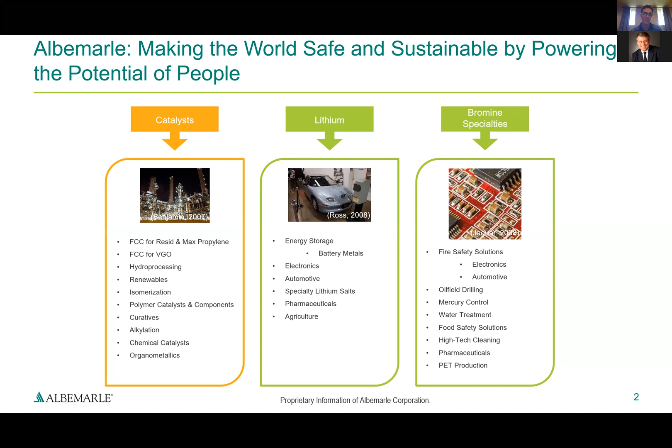And we as a business are looking at what are the chemistries that satisfy that need. And that's a little bit of what I want to talk to you about today.

I do want to call something out, and I do want to give a shout out to Anna Rogers. Anna Rogers, I think she's listening in. She is in our communications group, also an experienced technical writer. I guarantee you that nobody has ever seen a presentation with more citations than the one you're going to see today. Practically every bullet point has a citation. So Anna, great job with citations.

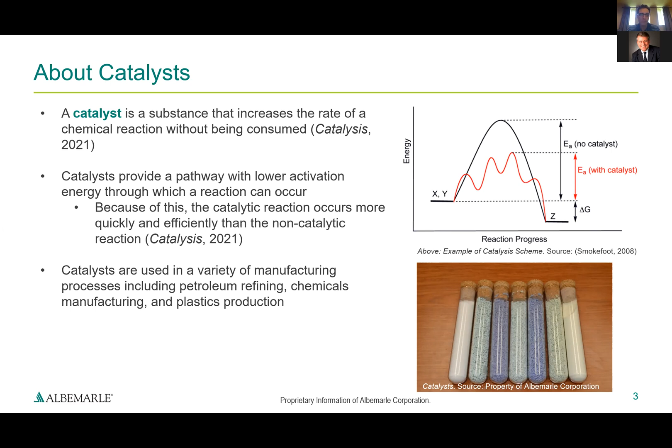So, kerosene and jet fuel, you'd be familiar with. Distillate is usually the term used for diesel and heating oil. Naphtha and gasoline within that range get blended into the gasoline that you use for your car. This is what happens in oil refining, step one. So if you go back before catalysts were used, this is about where it ended.

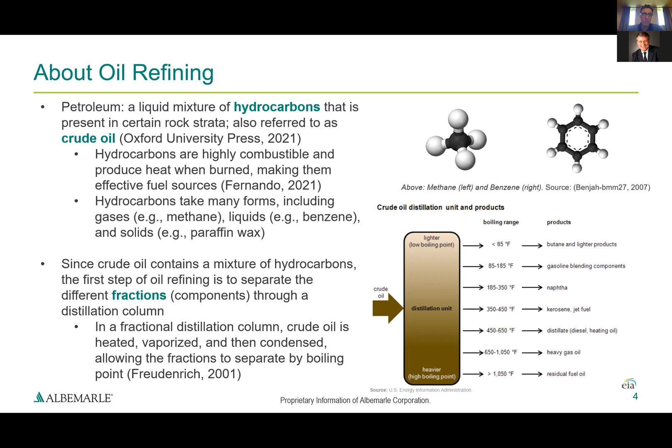When you pivot to using catalysts in refining, what you're doing is essentially fine-tuning that further fractionation of what you have. So after being separated in the distillation column, we further process those through catalytic processes. And there's two ways to get at that, right? It's often called cracking, and it means taking long hydrocarbons and breaking them into smaller fractions. Catalytic cracking uses a catalyst to speed up the reaction.

You can also do this thermally, which means by heat and pressure, but that's a slower process and it's more energy intensive. So catalytic cracking is the more common process that happens in industry to get to smaller and smaller chains, which become more and more usable to end markets that need chemicals or fuels.

And within the cracking world, there's two different kinds of cracking catalysts in an oil refinery. There's fluid catalytic cracking and hydrocracking. FCC cracks heavy oils, heavy gas oils like vacuum gas oils, what comes out of the distillation column, into gasoline, while hydrocracking cracks heavy oil into diesel and kerosene.

Now, Freudenrich has it right, but one additional piece on this is that when you do cracking of any kind, you get a mixture coming out of that. You don't just crack into gasoline. You get gasoline and you get diesel and you get kerosene and all the other fractions, olefins and things that come off of that. Just the process you use tends to give you more of one than another. So that's where FCC tends to crack more into gasoline, where hydrocracking cracks more into diesel and kerosene in volume percentage. So just to be clear.

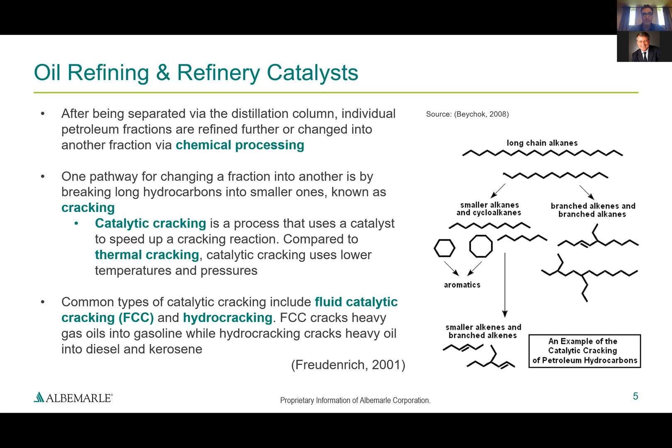In the FCC process, again, we're talking about the way it's done today, particles are fluidized, and they're put into the feedstock, and that feed is then vaporized and cracked. And hydrocracking catalysts really serve two fronts. It is about cracking, but it also has a process of removing sulfur and nitrogen through injecting the hydrogen into the unit.

Catalysts can also be used to do other things in a petroleum refining unit. And again, those in industry know that catalysts are omnipresent. They're everywhere. They're used for so many different things. We're specifically talking about refining. Catalytic reforming is used to generate aromatics and components for finished gasoline. Hydrotreating is largely used to remove sulfur and other contaminants. We talk about hydrotreating a little bit later, as to what can hydrotreating do for the new energy economy? Where does that fit into the world of biofuels or pyrolysis oil or other downstream applications?

Alkylation is used to make alkylate, which is a blending component for gasoline, and isomerization is used to convert light naphtha to higher value, higher octane gasoline. So overall, refiners are using an array of catalysts to crack the oil coming in, crack the vacuum gas oil coming out of the distillation column, to crack resid. They're also using it to reduce sulfur, and a myriad other applications within the refinery.

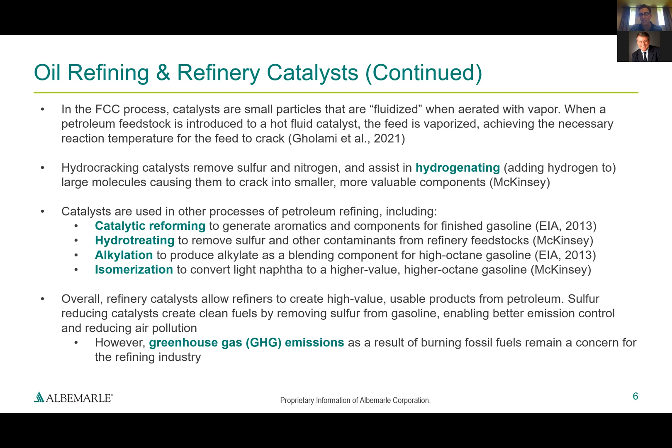With that, one of the big things that we need to be working towards is how do we address where the world is headed in terms of the need for lower greenhouse gas emissions that result from burning fossil fuels? How can refiners play a role in that next generation of energy, and what could catalyst suppliers like us, what could scientists in industry do? And that's why we're speaking to all of you. So I wanted to give you a view on what that could look like.

So let's talk about decarbonization of fuels. It's widely known that the economy is moving toward net zero carbon, moving towards cleaner feedstocks, lower greenhouse gas emissions from transportation fuels. And it's a collective effort. It's not just suppliers like Albemarle, it's the refiners themselves. It's a group effort to get to a lower carbon footprint from the use of transportation fuels.

One of those solutions is biofuel. Biofuel is made from biomass materials, generally regarded as a lower carbon impact fuel than traditional petroleum-based fuels for two reasons. One is while it does release CO2, it's often less than traditional fuels. And second, in order to produce biofuels, you actually have to be planting things. So the organized planting of bio-based materials that can go into a fuel creates plants that also absorb carbon. So the net effect of biofuels is the fuel itself, but also how you produce that fuel and where the feedstock comes from.

And the renewable nature of biofuels means that if done right, there should be, maybe not a limitless, but an eternal supply of fuel coming from bio-based materials if you're planting and farming in the right way and using it to produce fuels. Hydrotreated vegetable oils and biofuels are expected to grow at 33% CAGR through 2025.

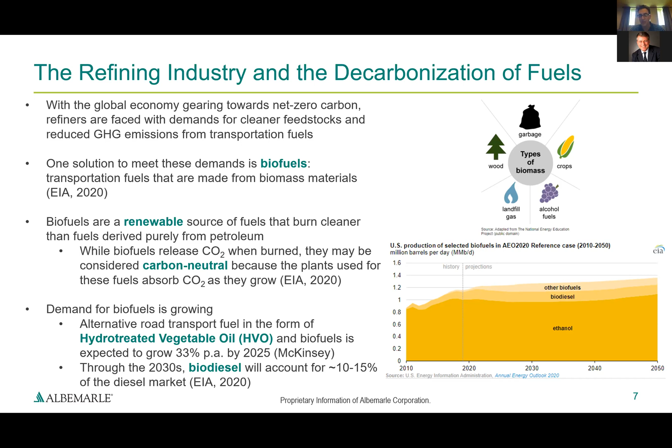So it's certainly going to be growing at a faster clip than traditional fuels and creates a tremendous opportunity. And through the 2030s, it's projected from EIA that about 10 to 15% of the diesel market will be biodiesel. So again, growing in its share of use in the market, which gives an opportunity for refiners to reinvent some of what they do in the direction of a more sustainable transportation fuel mix.

So how do catalysts play into biofuels? First of all, there's a few different ways. One of them is in the production of the biofuels themselves. There's a catalyst that's used in the conversion, multiple catalysts. So if I say a catalyst, I mean that there's families of catalysts that work towards producing renewable diesel, biodiesel. There's a lot of work being done on sustainable aviation fuels.

Traditional biodiesel is fatty acid methyl esters; there's multiple catalysts used for that, it's the original biofuel. And then certainly other catalytic processes to be able to make biofuels. The piece that's very interesting for a business like Albemarle, but also for the industry, is catalytic hydrotreating of renewable fuels. And what I mean by that is that if you consider where some of the biomaterial comes from,

whether it be from vegetable matter or used cooking oil or other materials, the challenge is it's not always clean, which means that when you're trying to crack that material or catalyze a biofuel, it's a challenge. And it's a challenge because the purity profile coming out may not be to the same standard as traditional petroleum-based fuels, just given the history of producing petroleum-based fuels. So there's a lot of cleanup that has to happen on the front end and on the back end of

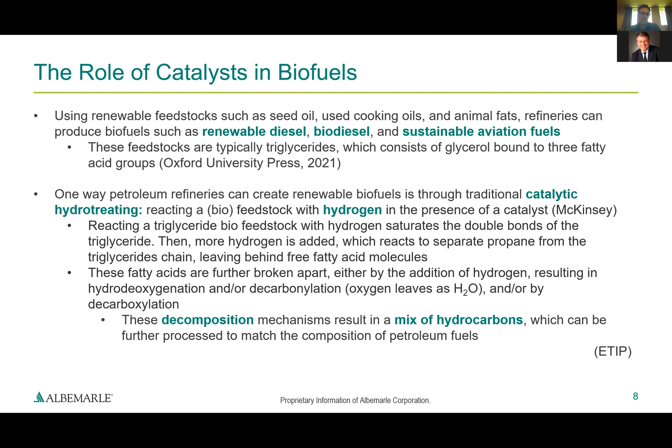Biofuels, again, you're dealing with biological material. It's not uniform. It creates a series of challenges as it relates to impurities within the material, and dealing with that can create yield losses. So if you're not using an effective method to clean up your biofuels, it often leads to a yield loss. Specifically, there are a series of reactions that produce CO2 and carbon monoxide, which become very detrimental to product yield. So in these cases, you have to use a catalytic process to trap some of those materials.

The HDM process is a catalytic process that's widely known and emerging in this space, which is specifically designed to remove phosphorus, alkaline metals, to ensure that the unit runs at maximum efficiency. Albemarle participates in this space, as do others. I would expect that as the market grows in biofuels, you will start to see more and more advanced catalytic hydrodemetallization processes to be able to clean up that space.

You know, the interesting thing, and you can probably consider this in almost any chemical process where you're mixing feedstocks together: at small scale, you can blend anything, right? If you have a bio feedstock that has some contaminant profile, but you're only blending it into your normal feedstock at 1% or 2%, it's probably okay. Your current system can handle some amount of tolerance of contaminants within what you're doing.

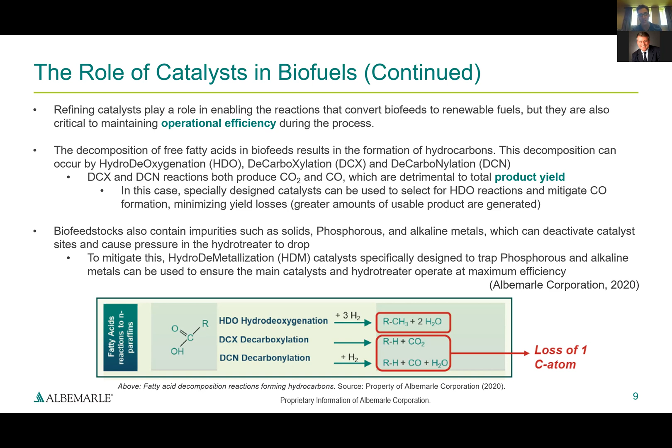in that range. So I think we have to be mindful, when you're a refiner or you're somebody supplying a refiner, of what you can do to help them build a sustainable business for the long term. Because you're seeing a demand decrease in the future for oil applications into fuel, but what will be growing? I think the piece that's going to continue to grow is on the petrochemical side. So this is really about shifting away from transportation fuels toward petrochemical applications.

Frankly, almost all of the new refineries, well, maybe all, I was going to say almost all just in case I'm off by one, but the vast majority of new refineries being built, first of all, are all being built somewhere east of Suez, and almost, if not all, of those refineries have a downstream chemicals unit associated with them, meaning that they're not just there to make fuel. They want to supply a local demand for fuel, but they certainly want to be able to make plastics as well.

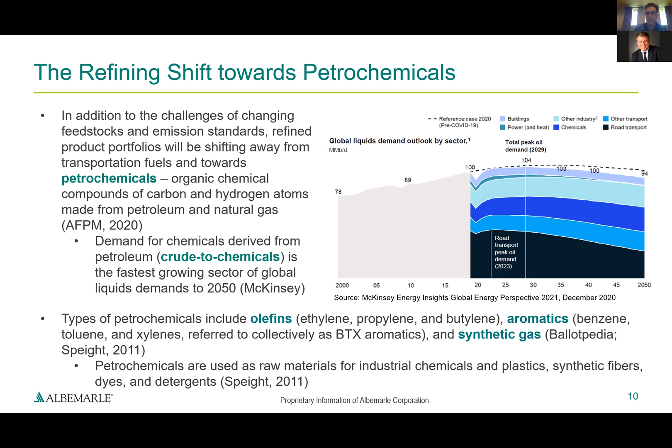Today, petrochemicals are primarily produced using LNG and crude oil. These are the typical feedstocks. In order to produce petrochemicals, you crack your feedstock at either high temperature and pressure or lower temperature and pressure using a catalyst. So that's the catalytic theme. Catalysts enable you to do things at lower temperature and pressure. Again, that saves money in terms of energy usage, natural gas usage, and it also happens quicker. High performance catalysts help you get this all done at lower temperature, lower pressure, and faster.

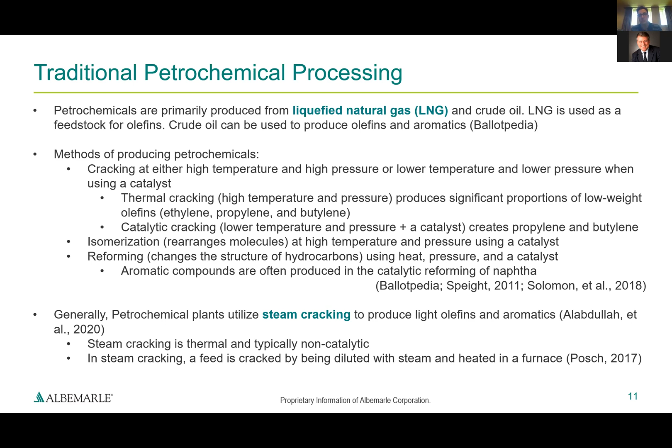So let's talk a little bit about how chemicals production is going to work going forward. Petrochemical plants and oil refineries, again, process hydrocarbons. They're making a whole slate of products. You can't make just one thing out of a refinery. You're going to make a slate of fuels, olefins, chemicals, oils; all of that will come out of a refinery. The refineries of the future will be the ones that, as I said, have a downstream chemicals component to them.

Older refineries are also able to retrofit, but it's tougher. It just requires more capital. It's certainly possible, and there are certainly options to do some different things with existing refineries. But it's a more capital intensive process than the new refinery builds, which already build that integration into what they're doing.

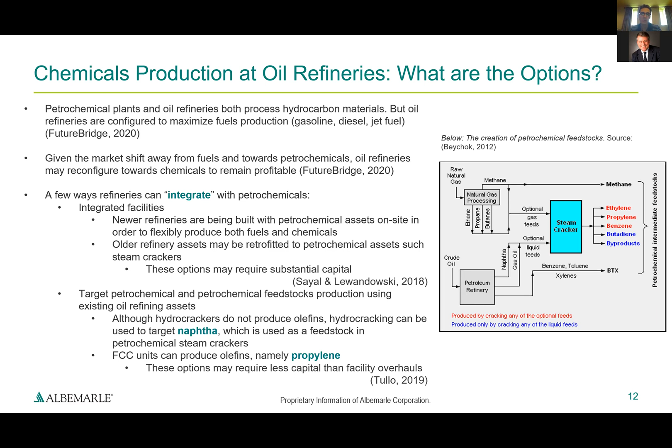And when we think about the target petrochemical and petrochemical feedstocks production, a lot of it is geared towards olefins, naphtha production, and also propylene as the most prominent olefin that folks are looking for. In fact, Albemarle has a lot of catalysts that are specifically designed for propylene maximization. It happens to be our area of super strength as a company. That's where we focus our attention, because we know the demand is there downstream for olefins production, specifically on polypropylene applications.

So what role does catalyst play in this shift? We've talked about a couple of shifts. I'm going to share three with you. One of them is the shift towards different kinds of fuel out of a refinery using a catalytic process. Number two is the role of catalysts in chemicals application. And we're going to talk about recycled plastic in the next one, which, again, I'm very excited about the potential for.

This one is, again, about propylene maximization from the fluid catalytic cracking unit. Typically, the output of propylene from a unit is around 5%. That's the normal yield on propylene from a refiner's FCC unit. That FCC unit is a critical unit at the center of the operation.

Lots of refiners are looking to push that number up. They're looking to get higher and higher yields. There's actually a catalytic additive called ZSM-5. It's a zeolite crystal, which allows for that higher activity, and it increases the rate of the reaction to drive higher yields. So the amount of additive you add and the effectiveness of that additive is going to drive up the yields.

There's certainly things that inhibit that. So there's processes within the refinery that could be at odds with that. It's a zero-sum game to some extent. As you're trying to push one thing up, another thing's coming down, and there's competing reactions within the refinery. So it's a careful balance of how catalyst suppliers, technology licensors, and refiners work together to drive the maximum yield of chemicals as they're trying to increase that balance of chemicals output versus fuel.

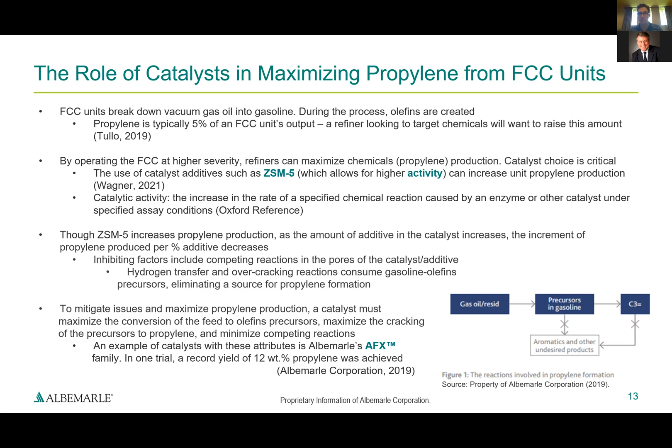So let me pivot to a final opportunity, and this is around waste plastic. We're all very aware that the world has an issue with waste plastic. I know it's heavy on the minds of consumers, on brand owners who have plastic packaging, and all the way back in the value chain. And it's a critical priority for petrochemical producers to be part of the solution to get to lower plastic waste in our oceans, in our environment.

There's several different ways to recycle plastic. The one I'm going to talk about today is pyrolysis. Pyrolysis is a high temperature, high pressure process. It was originally used with biomass, now used with waste plastic, to turn plastic waste into a synthetic oil that can be refined into fuels, or in many cases blended back into the feedstock, can't call it virgin plastic, but as a component into new plastic production.

Catalytic processes play a huge role in pyrolysis. They're there to drive the reaction, to get the pyrolysis reaction complete. As I said, it's done under extreme pressure and temperature conditions. So to the extent that that can be reduced, it opens up the world of how we can do pyrolysis applications with plastic, which can make a huge dent in the world's challenge on plastic recycling.